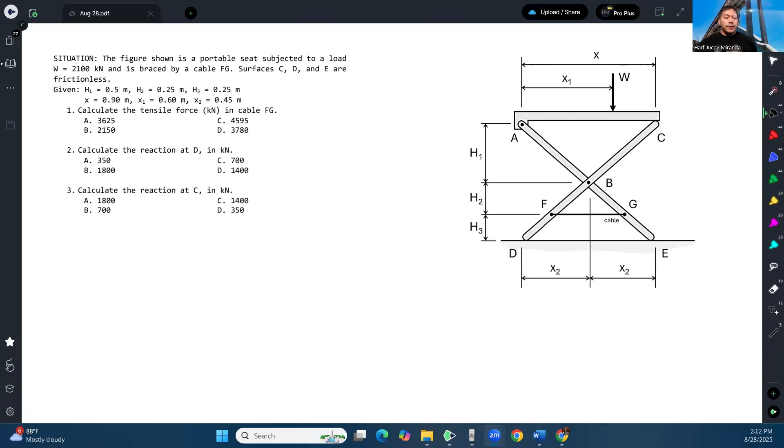Okay, so situation. The figure shown is a portable seat subjected to a load W equals 2,100 kilonewton and is braced by cable FG. Our cable. Surfaces C, D, and E are all frictionless.

So you're given H1 to be 0.5 meter, H2 to be 0.25, and H3 also 0.25. X is 0.9, and then X1 is 0.6, and lastly, X2 is 0.45. So those are the dimensions.

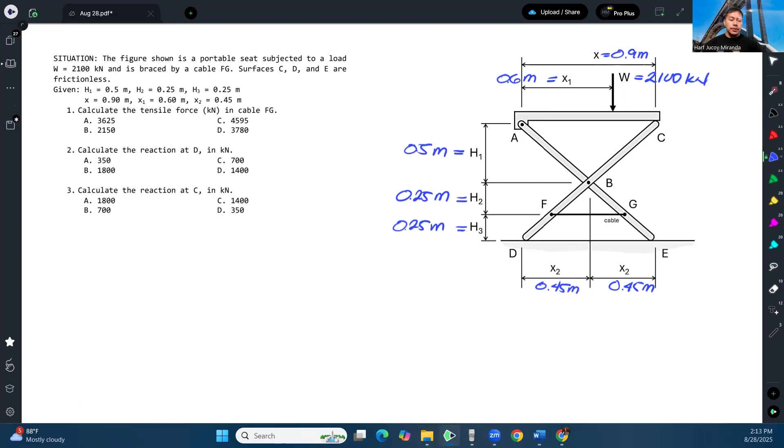Now, for the first question, we are asked to find the tensile force in cable FG, and then we are also asked to find the reaction at D and find the reaction at C.

So, in this particular example, we consider this structure to be a pin-jointed frame. It's a frame, but its joints are either pin, hinge, or smooth surface. Like C, D, and E, we consider those as smooth surfaces because it's stated that all of those are frictionless. So, since frictionless, the only resisting reaction, or the only reaction there, would be the normal reaction or normal force.

So, if we would draw the free body diagram of the entire structure, let's use this figure. This represents the free body diagram of the whole structure.

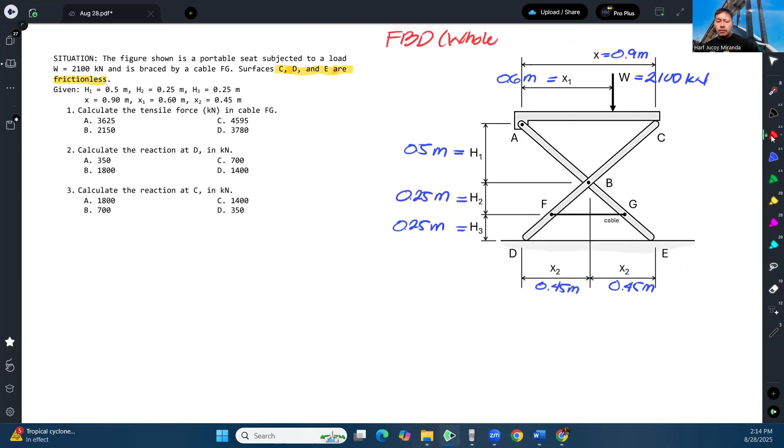Now, as you can see, even though we know the members are actually separate, we are assuming this represents the whole structure. But that's the point of drawing the free body diagram — we choose which body we want to draw the free body diagram for. And in this case, I want the whole structure.

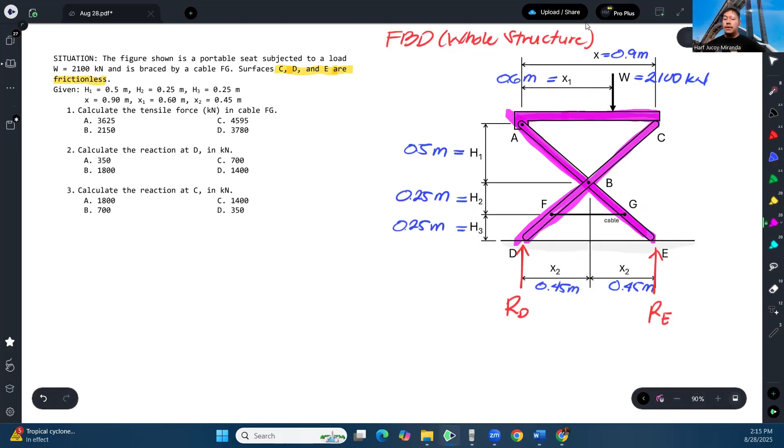So we are considering this as an entire structure, we don't care about its internal connections. This is included too. So what are all the forces acting on that body, on that structure, from outside? Just this, plus the two reactions here.

Nothing else. Once you master the ability to represent all the forces acting on a body, it will simplify your analysis on more complicated structures. And often we get confused about the forces acting on a structure, especially if it's complicated, because we can't identify the forces acting on a certain body.

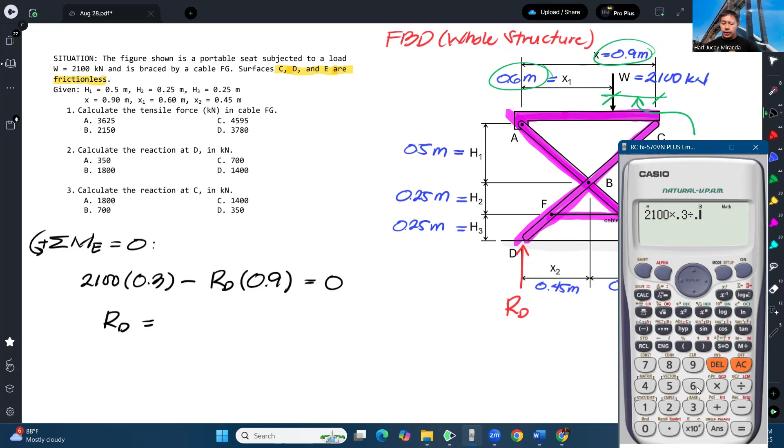And from there, we can answer number 2 directly. So that's 2,100 times 0.3 over 0.9, and that gives us 700 kilonewtons.

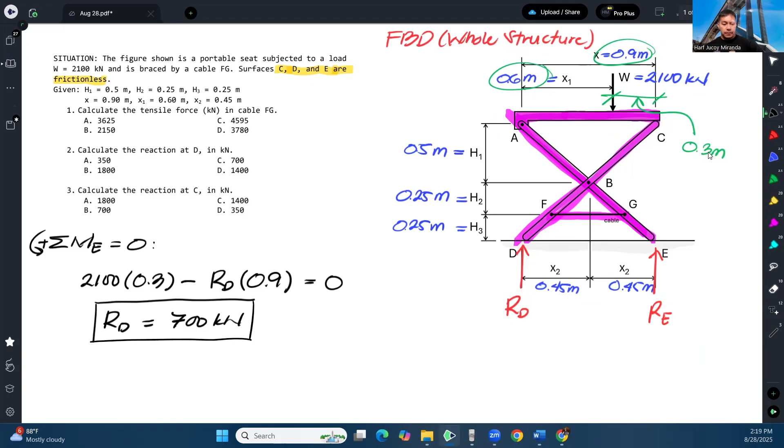Okay, and that would be letter C for number 2. So let's solve number 2 first, since it's faster to get.

Next, we are also concerned in finding the reaction at C. So we can now get the reaction at C. At this current free body diagram, the reaction at C is not visible, because the reaction at C is not an external force of the structure we're considering.

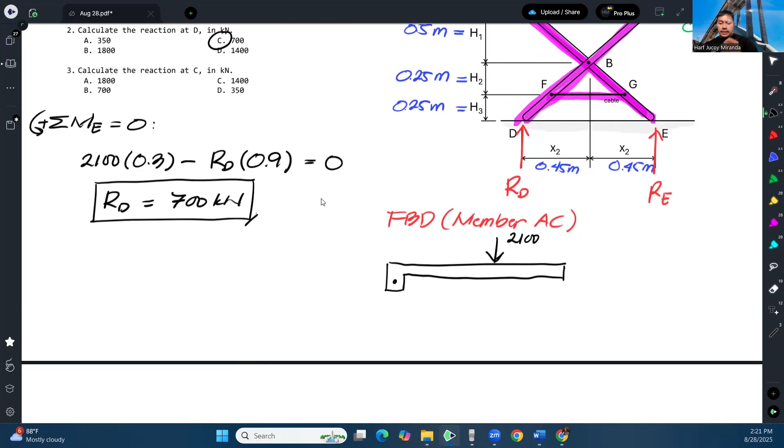Let's redraw it. So that would be member AC. So here's the weight, 2,100. Okay, now let's add measurements. From the original figure, this is 0.6 and 0.3.

Since we've isolated this member, we will now again identify all the external forces acting on it. So currently, the 2,100. What else? Since this was originally connected to member ABG via a joint or hinge, we know that a hinge has vertical and horizontal reactions. So let's add them - at point A, I'll call them AY and AX.

And also at point C, we have a reaction there because it's a smooth surface, so it has a reaction perpendicular to the surface of contact. Since the surface of contact is horizontal, that reaction would be vertical. Let's call it RC.

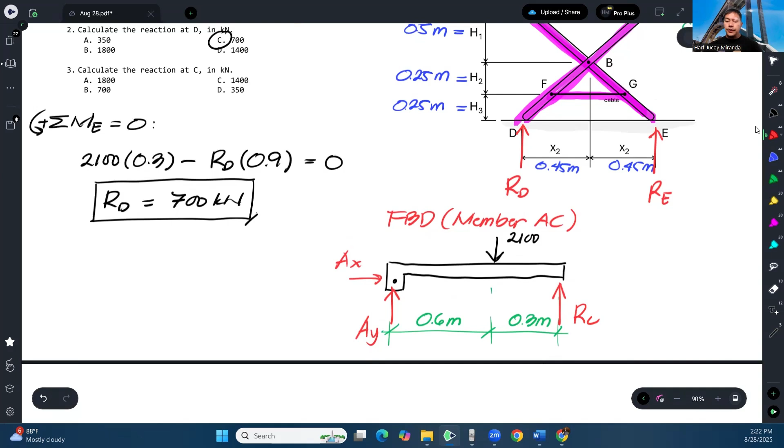And that's it. We can solve for RC directly if we sum up moments about point A. So taking summation of moment about point A equals 0, and considering only the free body diagram of member AC - just this - so we'll only look at this.

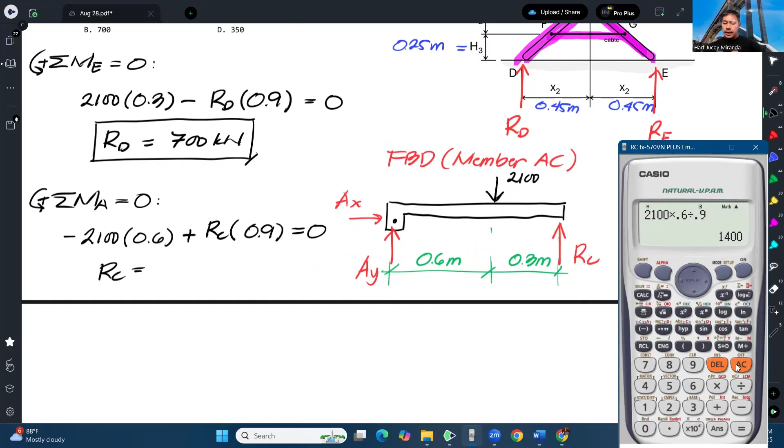If we take summation of moment at A, we will have 2,100 times 0.6 as the moment arm, and that will be negative because this gives a clockwise rotation. RC will give a counterclockwise rotation, so plus RC times the moment arm of 0.9, and that is all equal to 0. So therefore RC can now be calculated: 2,100 times 0.6 over 0.9, and that gives us 1,400.

Okay, and that is our answer for number 3. Now for the tensile force in the cable, we are ready to use this member since we've already computed the reaction at C. So if we isolate member DBC, the unknowns left are the reactions there - two of them - plus the tension in the cable.

And we've also already solved for RD. So that means there are only three unknowns left, which is solvable because we have three equations of equilibrium: summation of forces along x equals 0, summation of forces along y equals 0, and summation of moment equals 0. That's why it's better to isolate this one. So let's draw the free body diagram of member DFBC.

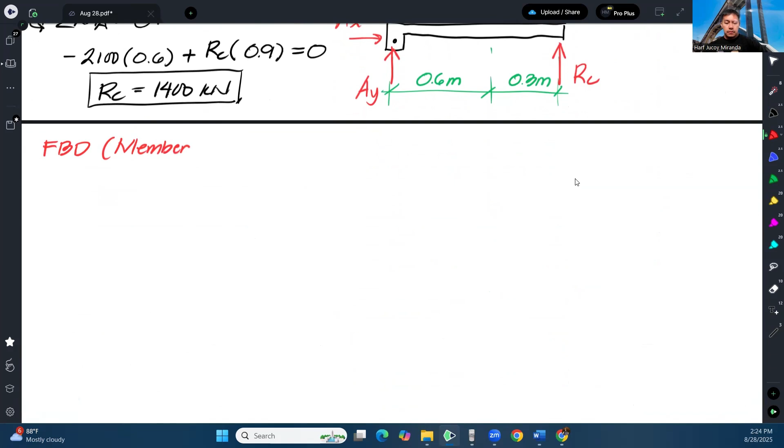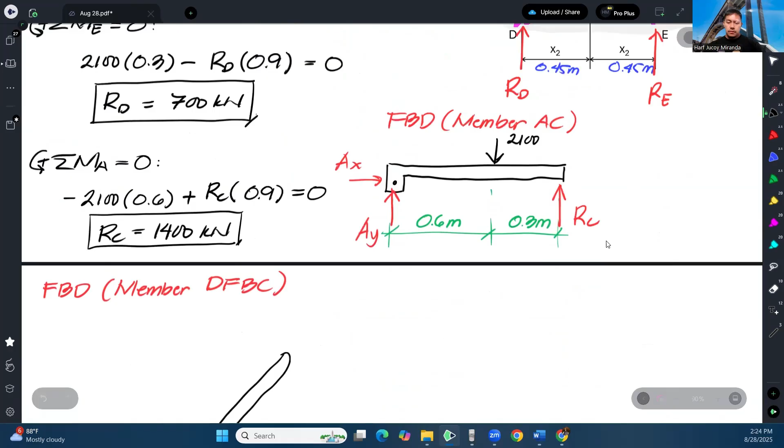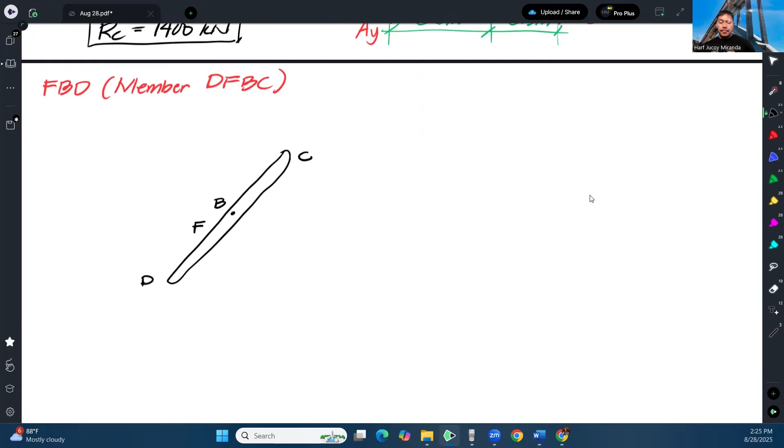Okay, so let's say this is D, this is F, this is B, this is C. So at F, we have a cable attached there, so therefore there's tension there.

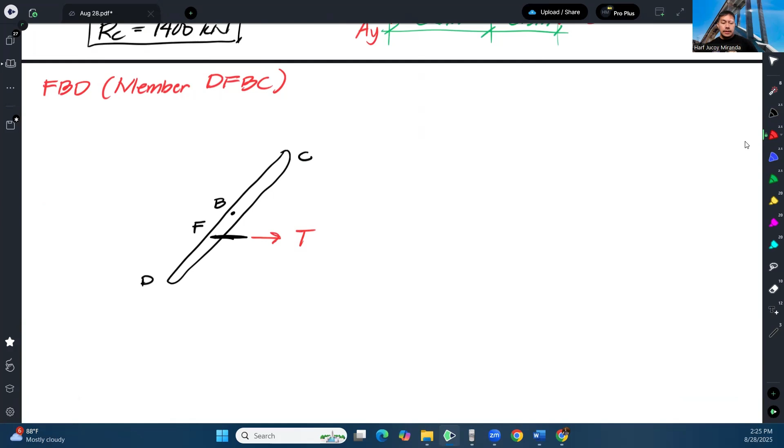Then earlier, we had a reaction here, RD, and the value was already calculated to be 700. So I'll put the value, 700.

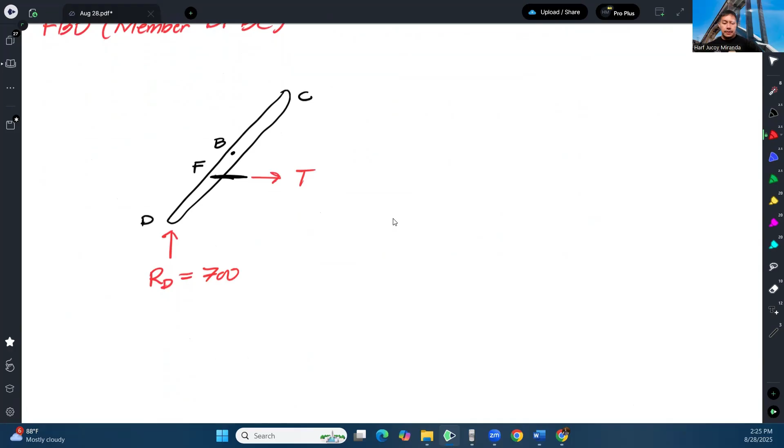And lastly, as we calculated earlier, there's also a reaction here at this surface. So earlier, when we computed the reaction at C, we assumed it would be upward, and based on our computation, the value we solved for RC was positive.

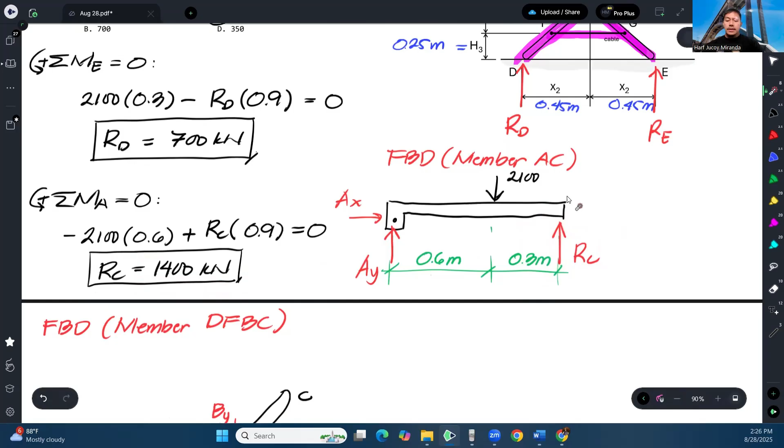Now, why is that important? Because this particular point is in contact with this particular point, then we must always consider Newton's third law of motion, which states that for every action, there's always an equal and opposite reaction.

So that means, when we draw the free body diagram, this is one member, and we proved here that the reaction at C is upward. So when we transfer that to the other member attached to it, the reaction at the same point should be downward, or opposite. That is the action-reaction principle of Newton.

So therefore, our RC here should be drawn downward, and the value is 1,400.

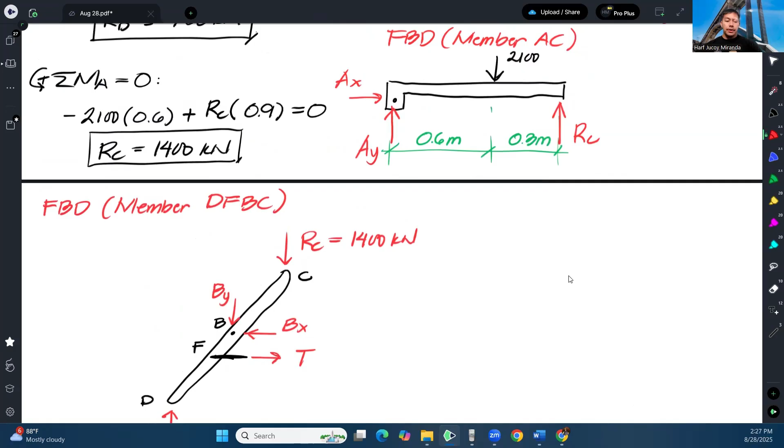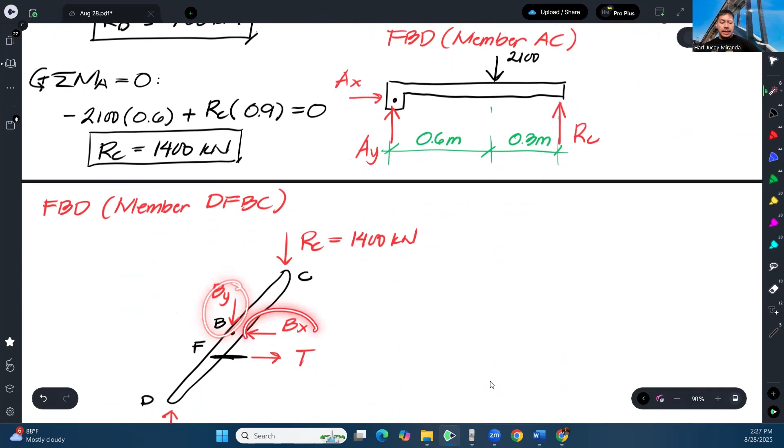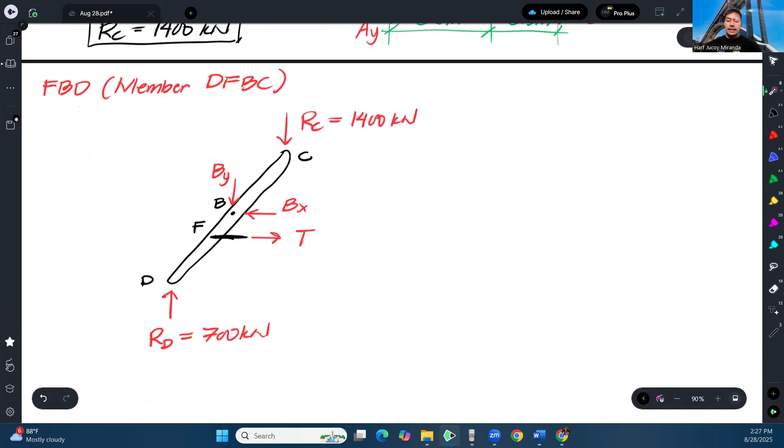Okay, so that's it. That's all the forces acting on member DFBC, unless we forgot something. Let's go back - there's a reaction here, this one. The reaction here, these two, since that's a pin or hinge. Then the cable here, this one. And then the reaction here at the bottom, this one. And there are no other external forces applied. So that's it.

So all that's left to do is analyze this. Now, like I said, we could use summation of forces, but to solve T directly, we'd need summation of forces in x. However, we don't know the value of BX. And since we don't know that, let's think of another equation of equilibrium we can use.

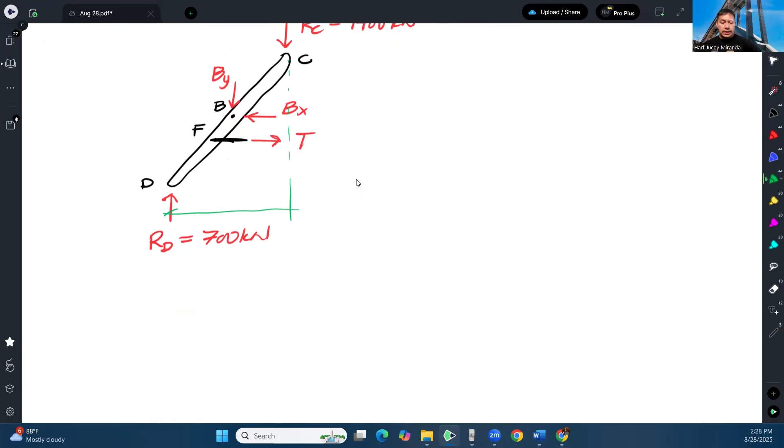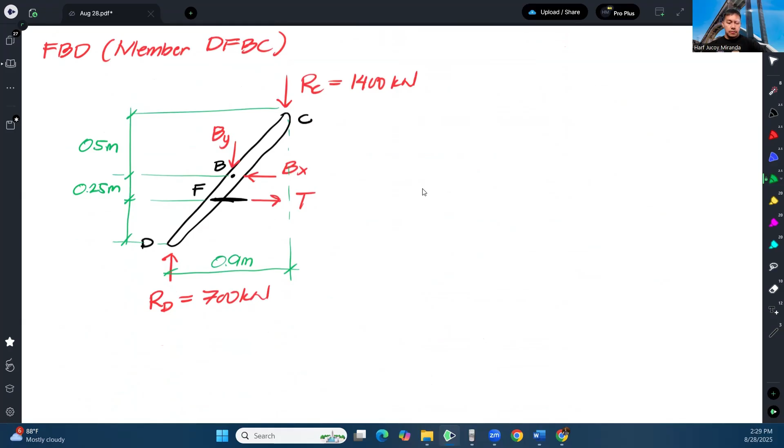Okay, so let me put in the distances. This was 0.9. And then, based on the figure, 0.5, 0.25, 0.25. So therefore, is that right? That's 0.9, right?

So therefore, let's take summation of moment at B, assuming counterclockwise positive. And again, what we're looking at in this summation of moment is member DFBC. Let's start - let's take the tension first. It rotates at B counterclockwise, so we have T times, the moment arm will be 0.25. That's our distance here.

Okay, next, RD which is 700. Its moment arm from B, I didn't put it yet - let me divide this. Since we're taking moment at B, this is the part we're considering. So 0.45 and 0.45. So the moment arm is 0.45. And the rotation of RD is clockwise, so this should be minus.

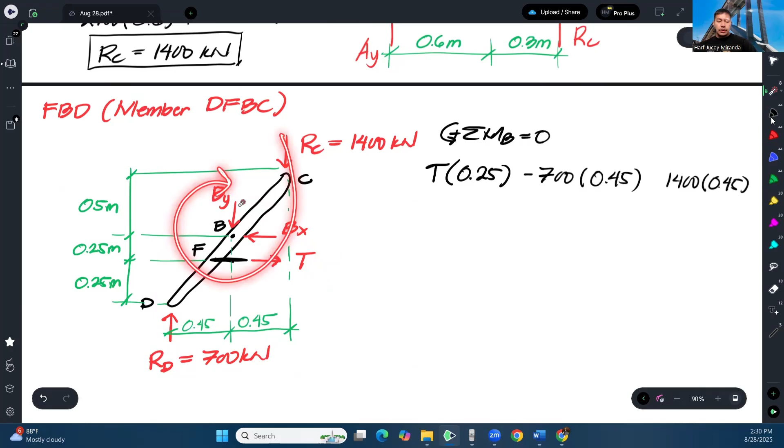And then 1,400, its moment arm is also 0.45, and the rotation it will produce is also clockwise, so negative. And that's all equal to 0.

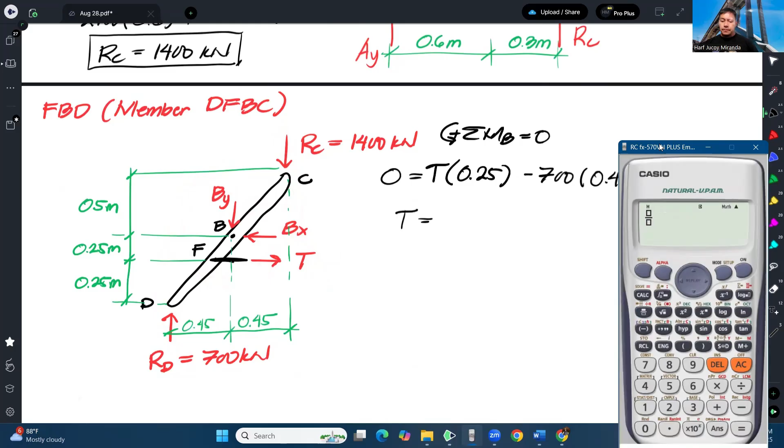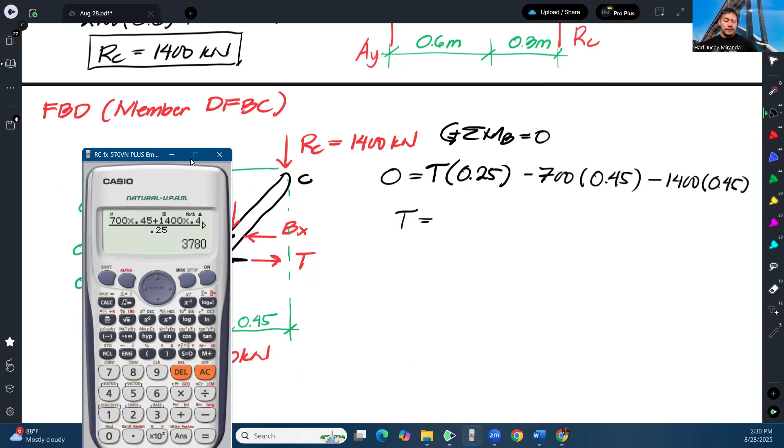And from here, we should calculate the tension in the cable. So we have 700 times 0.45 plus 1,400 times 0.45, over 0.25. And that gives us 3,780 kilonewtons. Okay, and our answer here would be letter D.

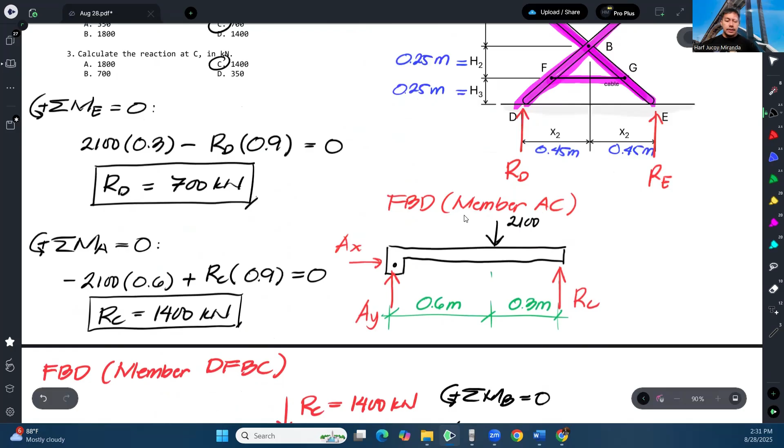Okay, so that's how we solve this problem.